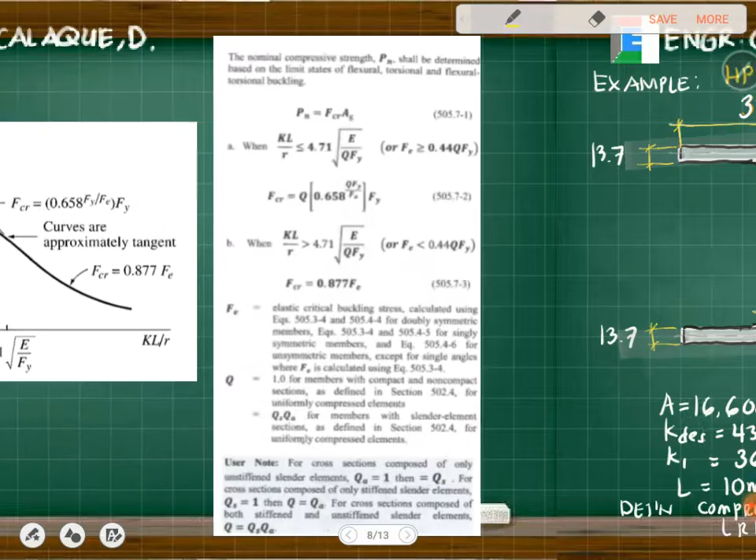Let's go back to the NSCP code, which I discussed in the previous videos. This is the classification of section for local buckling. Sections are classified as compact, non-compact, or slender element.

For a section to qualify as compact, its flanges must be continuously connected to the web, and the width-thickness ratio of its compression elements must not exceed the limiting width-thickness ratio lambda p from tables 502.4.1 and 502.4.2. If the width-thickness ratio of one or more compression elements exceeds lambda p but does not exceed...

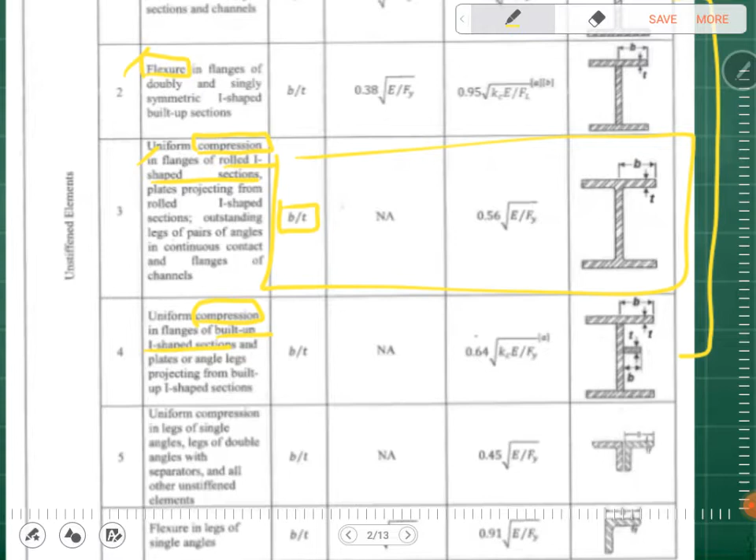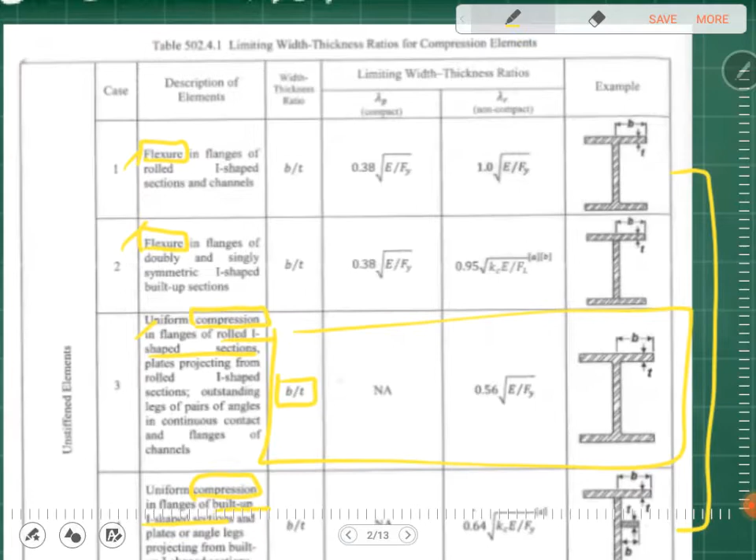I hope you're following. So for lambda P, that's N/A — this is the only one that applies — 0.56 times the square root of E over Fy. So that's it for considering the flange.

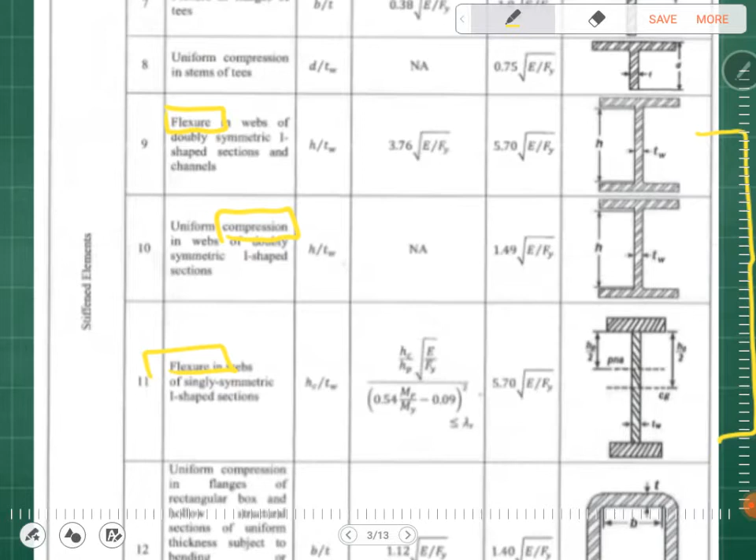So what we're looking for is still the width-thickness ratio, but in terms of H over T since we're considering the web. You'll see here it's under bending, this is compression, and here it's bending again — so it means case 10 is the one we'll use for H over Tw, the thickness of the web.

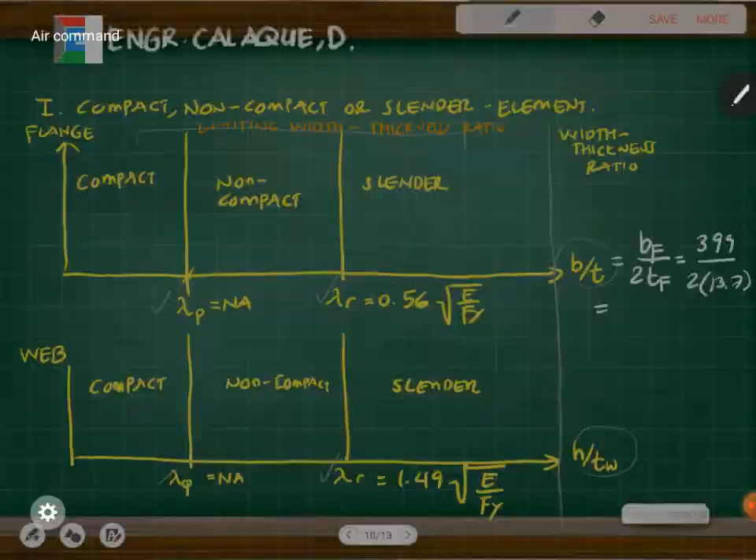So, kung i-calculate natin yan, we have 399 all over twice ng 13.7. So that equals 14.562. Okay ba? So we have 14.562. Ngayon, ilo-locate natin yan dito.

So kailangan natin makuha muna to. Ilan yung 0.56 ng square root nung 200,000? That is constant for steel, no? Yung elastic modulus na yan. Then yung Fy natin is given, we have 345. So yun daw yung gagamitin natin. So we have 345. So therefore this is equal to ilan to?

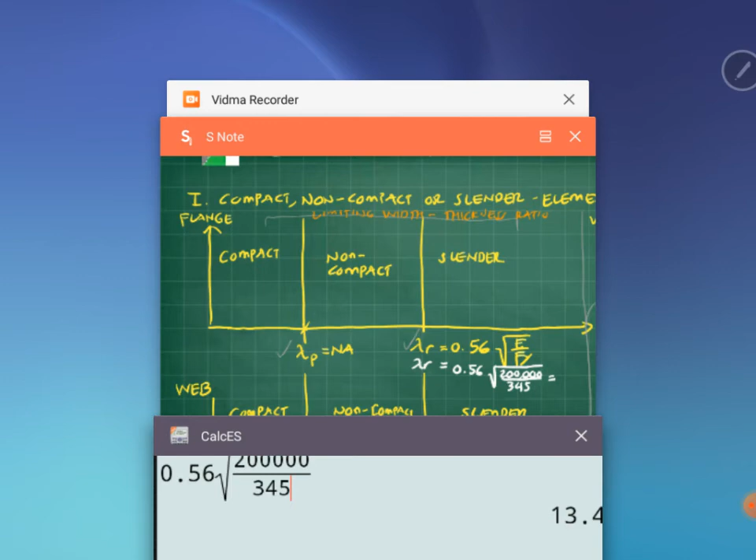So kung kukumputin natin yan, we have the value of 0.56 square root of 200,000, all over the Fy, 345. So therefore that is 13.48. So this one is 13.48. So yung point pala na to is 13.48, provided ito yung 0 natin.

Bali yan yung origin. So kung ipa-plot natin yan, yung 14.56, I assume na andito siya banda. Kasi 13 to eh, so ibig sabihin mas malayo pa siya. So I assume na ito na lang yan. So andito yung location nung B over T, which is 14.562. Okay ba? So andyan na-locate yung 14.562.

So ibig sabihin that is under, saan siya? Under ng slender. So bali yung flange pala natin is slender. So mas prone siya dun sa local buckling. So andito siya banda, prone siya for the local buckling. So ibig sabihin nito is slender yung section, ibig sabihin is slender yung flange. So flange is slender.

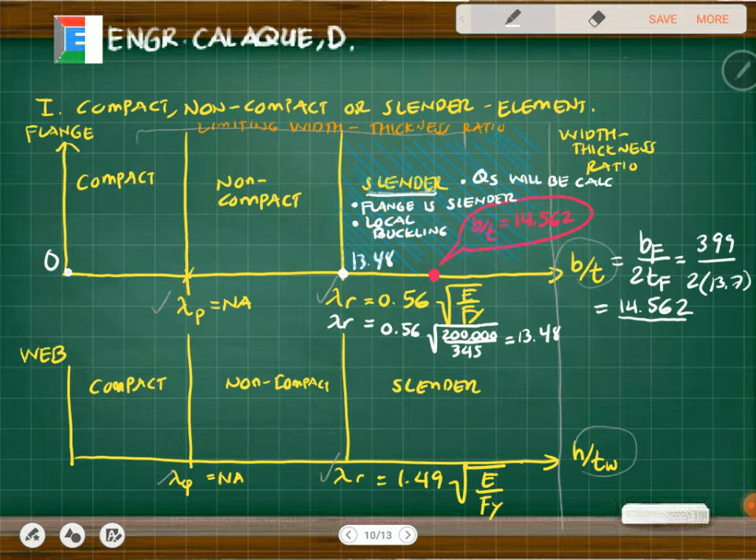And then kailangan nating i-ano yung local buckling kasi prone siya for local buckling. And then kailangan natin computein yung QS. So we need to... wait lang. And we need to calculate for the QS. Okay, so QS is to be calculated. Okay ba? So I hope klaro yan for the flange. And then next is yung sa web, nandito naman. So okay na ako sa flange.

Next is sa web. Ilan pala to? Computing ko na lang to. Ilan to? So yung lambda r, we have 1.49 square root of 200,000 all over 345. So therefore we have ilan yan? Papalitan ko lang to ng 1.45 na. So we have 34 point... tama ba? Ilan to? 49 no?

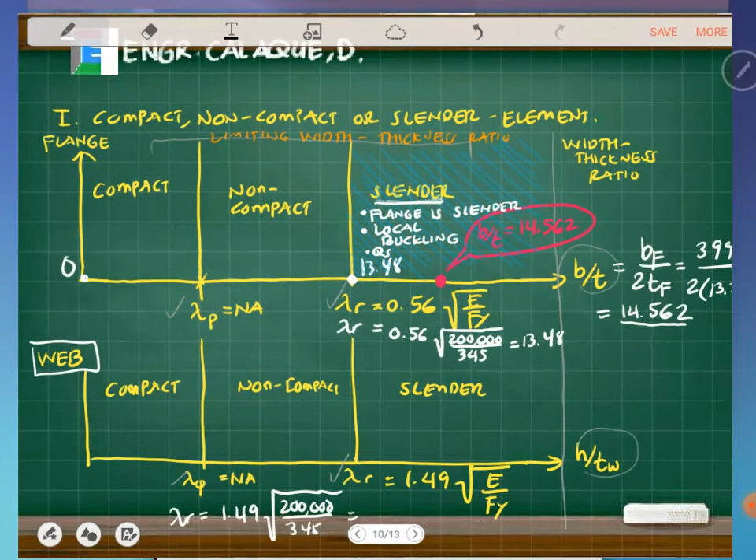Yan yung nasulat ko. 49 na? 45 pala nasulat ko, 1.49. So 35.87. So we have 35.87. Ayun, so yung point pala na to is 35.87, considering ito yung origin natin, so 0. Okay so I hope klaro yan.

Then next natin kukumputin is yung h over tw, no? So yung h natin dito is just makukompute natin yan automatic. Dito ko na lang ilagay, so that is just the effective depth minus yung twice nung k na to, which is 43 point... kasi ito yung k. So therefore yung h natin is meron tayong 389, which is ito yan, yung effective depth. Hindi, yung depth lang. RC lang. Yung depth na 389 twice ng 43.7. So therefore, yung value ng h pala natin is just equal to...

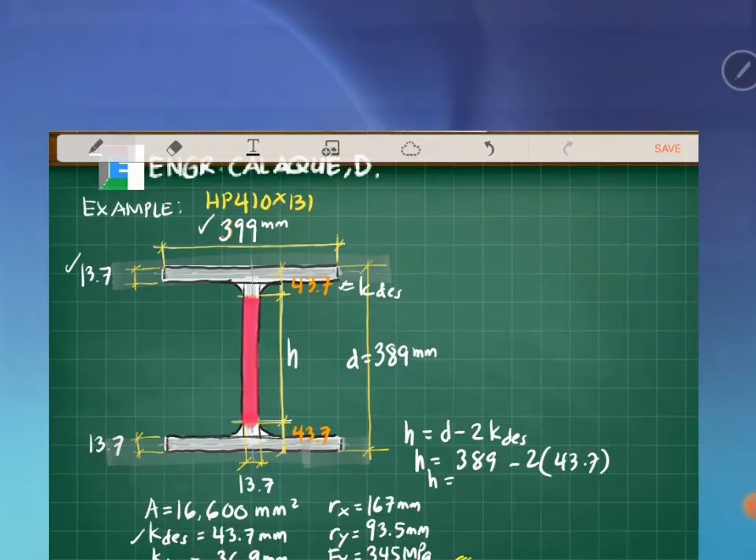Yung h natin is equal to, ilan yan? 389 minus twice ng 43.7. Tama ba? 43.7, okay tama. So we have 301.6. Okay? 301.6. So this is 301.6 mm, no? At least klaro tayo dito, ha?

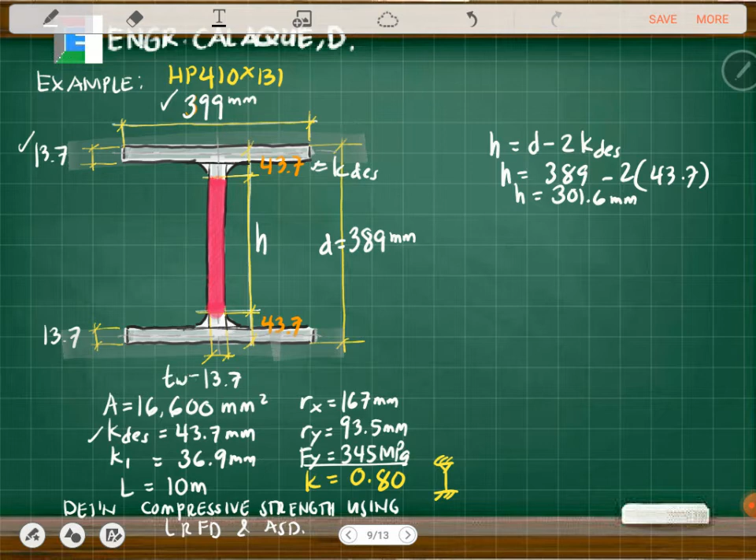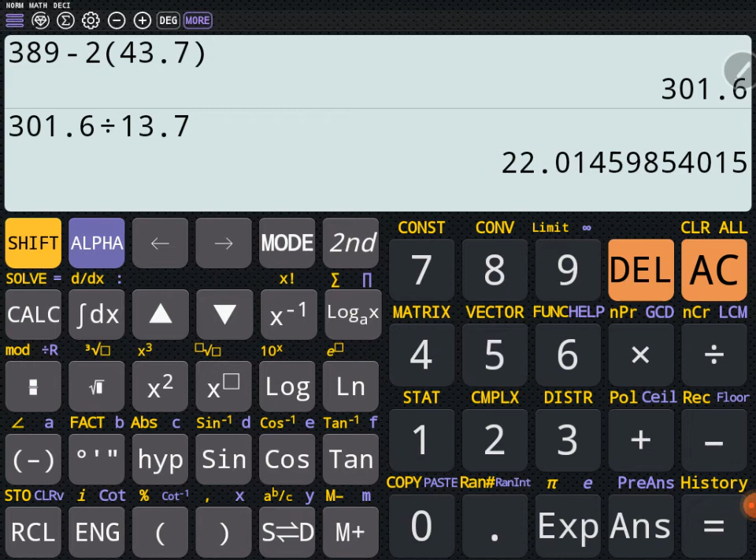Dito ko na siya isulat. So, ibig sabihin, kung ito siya is 301.6, so divide na lang natin ng thickness nung web, which is ito yan, 13.7. So, ibig sabihin, this is equal to, ilan yan? 301.6 divided by 13.7. So, therefore, we have 22.015. So, this one is 22.015.

So, kung ilo-locate natin yan dito sa section, sa region natin. So, 22, bali less than siya ng 35. So, assume ko na lang na andito siya since wala naman ding compact eh. So, hindi pwede siya mag-fall sa compact or non-compact. It doesn't matter, no? So, we have this one for h over tw, that is just equal to 22.015. Di ba? So, ibig sabihin, andito siya na region nag-fall, no? So, assume na lang natin na ito yun.

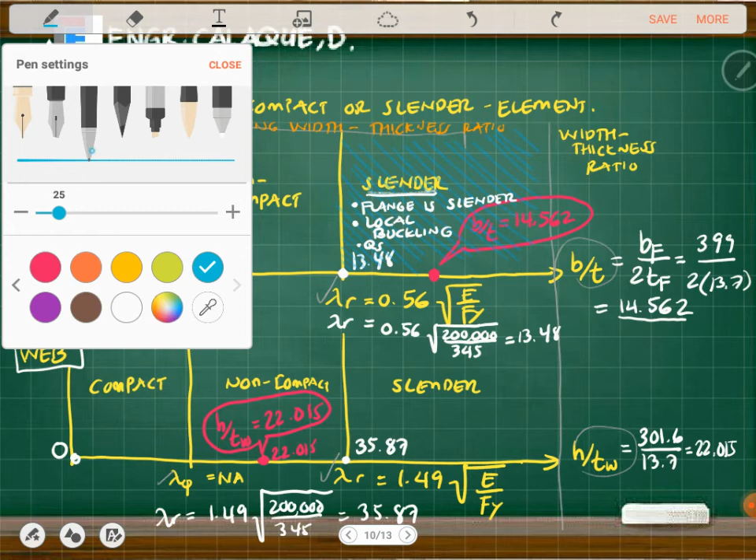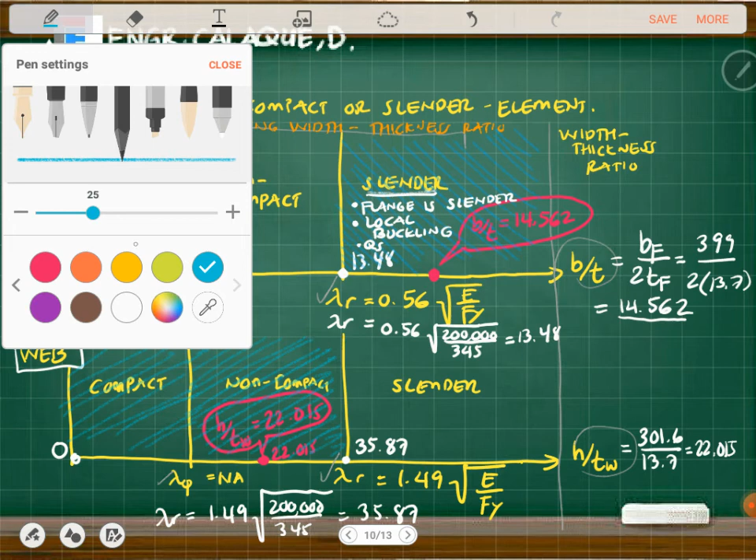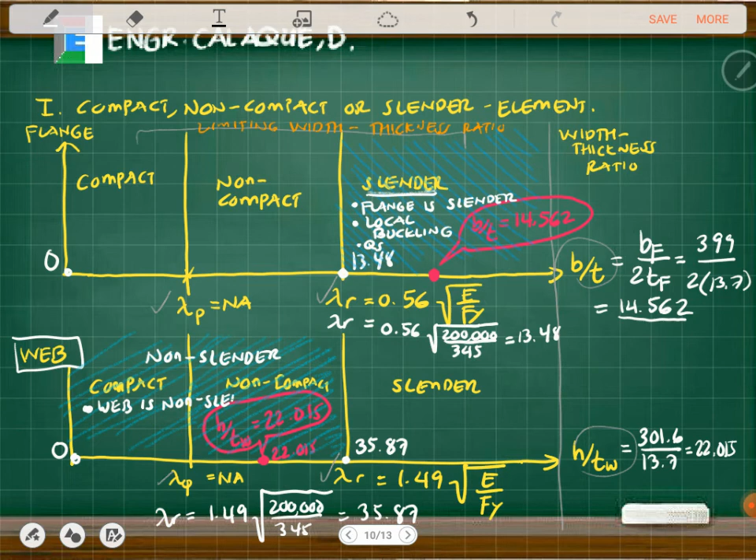So, dito siya nag-fall, no? So, we consider this as non-slender na lang, no? Kasi, hindi natin alam kung saan ba siya dyan, compact or non-compact. So, mas safe, sabihin na lang natin na non-slender. So, ibig sabihin, since andito siya, so, yung web is non-slender. And then, since hindi slender, so, hindi critical yung local buckling, no? So, local buckling is critical dito, no?

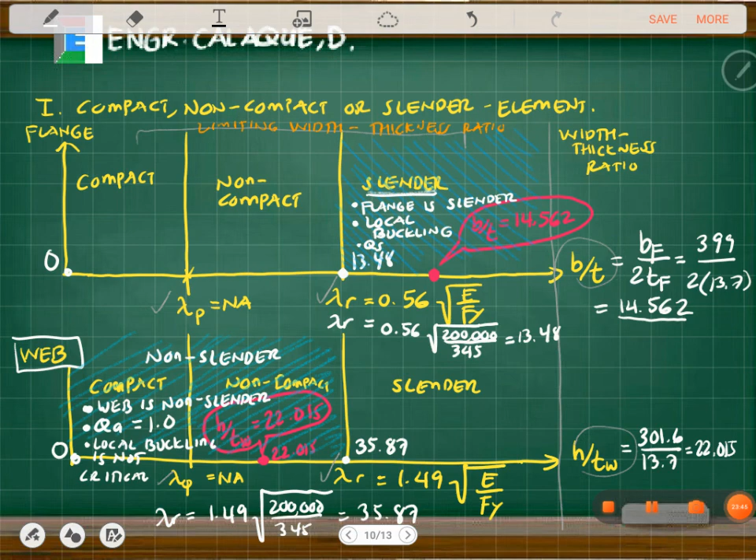Dito is automatic na yung QA, di ba? Equals 1.0. And local buckling is not critical. Okay? So, yun, no? Dito sa slender is yung local buckling is critical. Okay ba? So, I hope may natutunan kayo dito, no? So far, ito pa lang yung part 1 natin. Kasi naghahanap pa tayo ng... sige lang, continue na lang tayo sa next na video. Thank you.